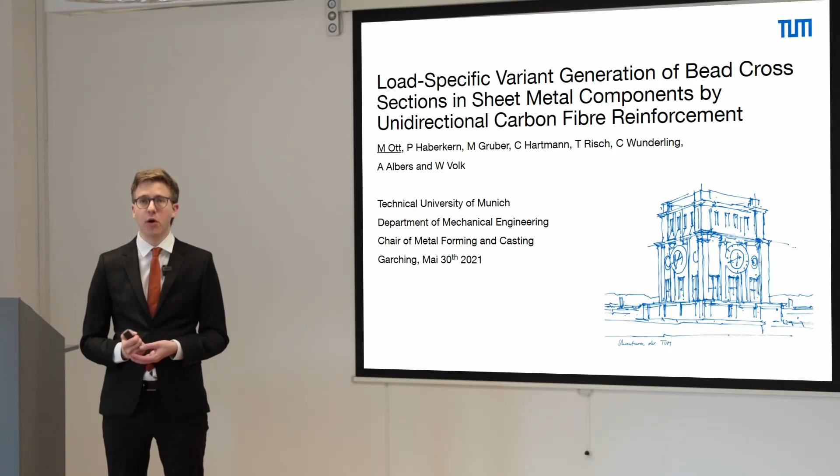Welcome to today's presentation where we would like to show our approach for the design of load-specific component variants in sheet metal forming using fiber-reinforced hybrid beads.

We'd like to start with a summary of the state of the art. Beads are channel-shaped load support structures which can be integrated in sheet metal components, as these three examples from the automotive industry show. To utilize the full stiffening potential of the beads, they must be aligned within the component.

In order to solve the resulting topology optimization problem, several numerical algorithms have already been developed. For example, the algorithm shown here by Macic aligns the beads according to the principal bending stresses within the part.

To summarize, several targets can be met by integrating beads into sheet metal components. First and foremost, it's an increase in bending stiffness, or when lightweight design goals have to be met, an increase in the mass-specific bending stiffness.

Second, a shift of natural frequencies can be used to deal with eigenfrequency and resonance problems. Third, the control of the deformation behavior in crash elements, which is important in the field of automotive industry.

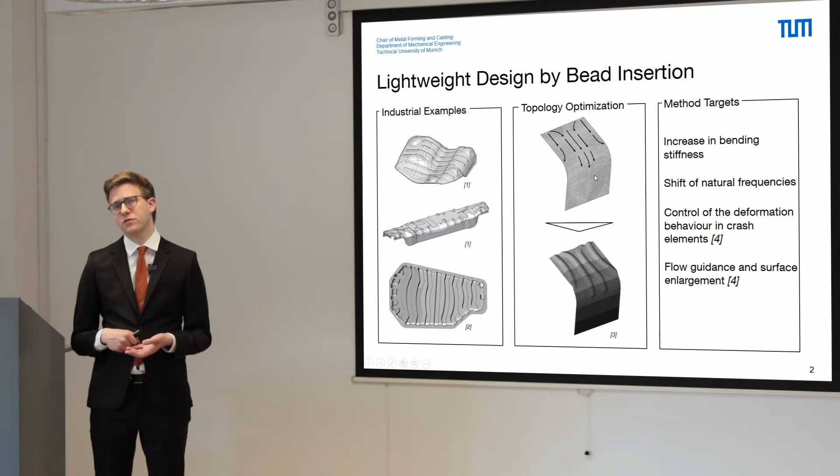And number four, flow guidance and surface enlargement of the beads show that they can be used for heat transfer problems.

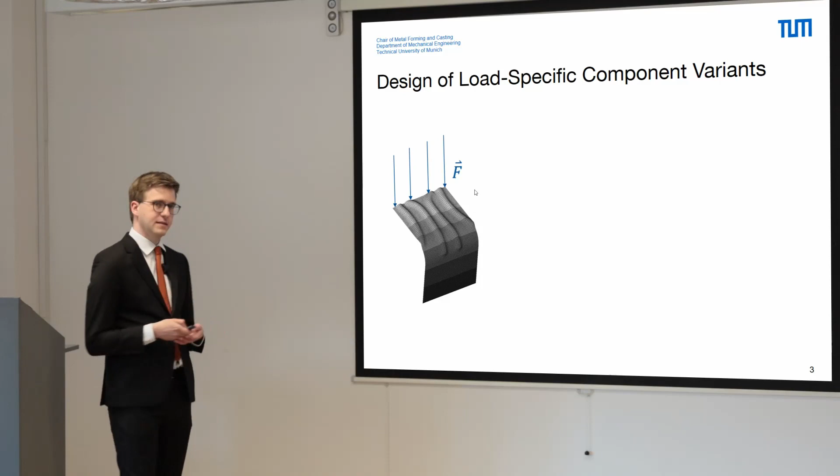Based on these results, we propose an approach which can be used to derive load-specific component variants. Various designers face the problem that multiple component variants are subjected to various load cases. In order to meet lightweight design goals, it is useful to create several component variants.

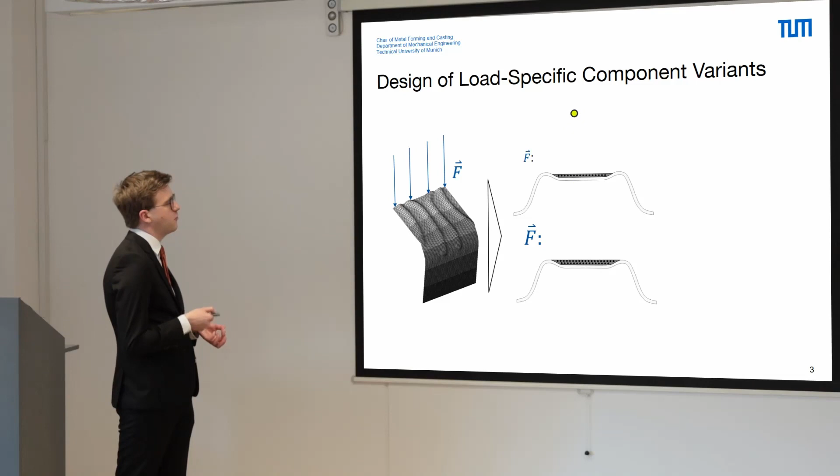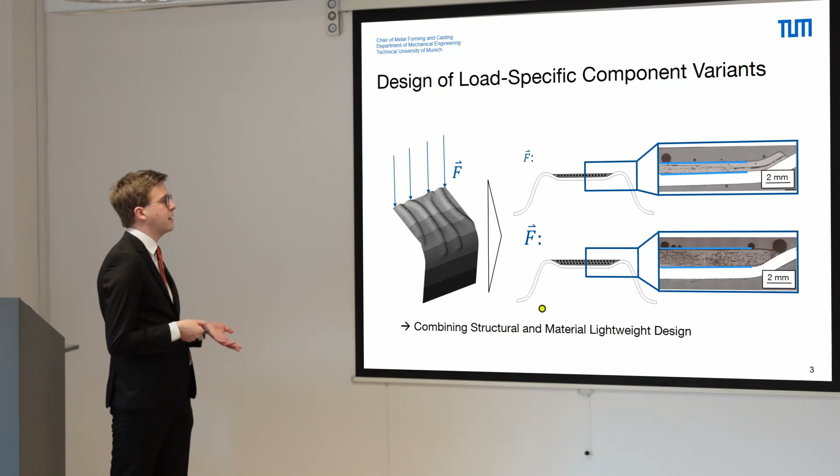And since changes to the forming tools are quite costly in metal forming, we suggest instead of bringing in multiple reinforcement structures which consist of unidirectional carbon fiber reinforced plastics. So the goal of our approach is to combine the structural lightweight design of the beads with a multi-material lightweight design.

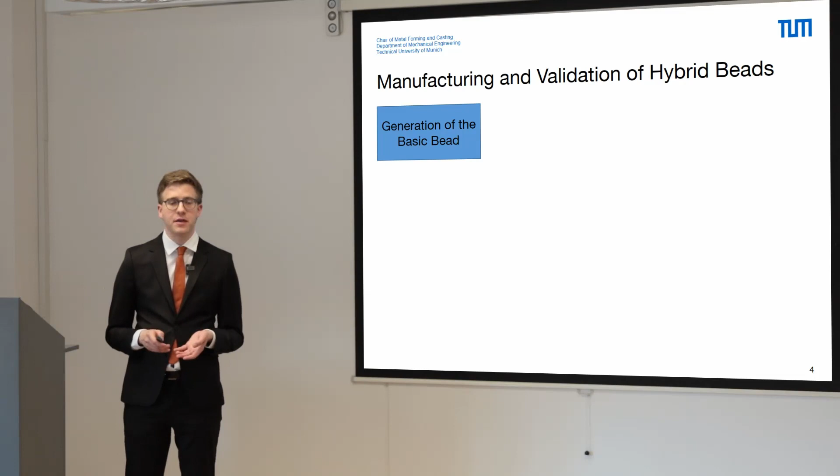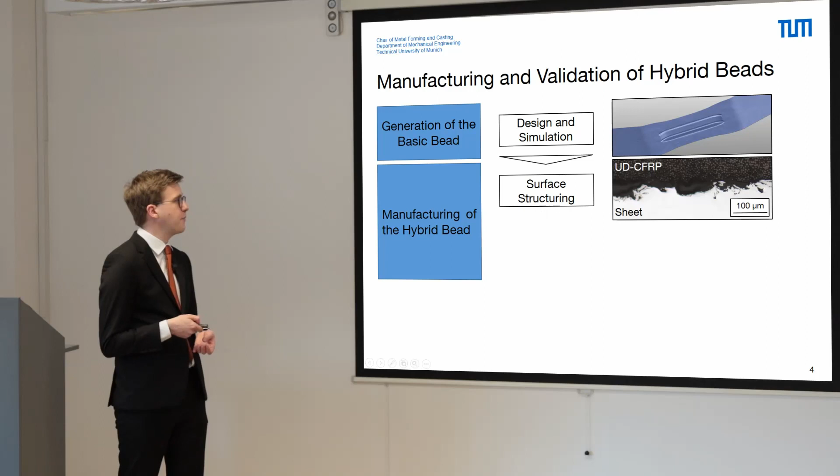Our approach therefore consists of several steps. In the first step, we generate the basic sheet metal bead geometry using design and simulation tools. In the second step, we manufacture the hybrid bead, which can be subdivided into a surface structuring step and the lamination step. The last step of our approach is to measure the supportable loads of our hybrid beads.

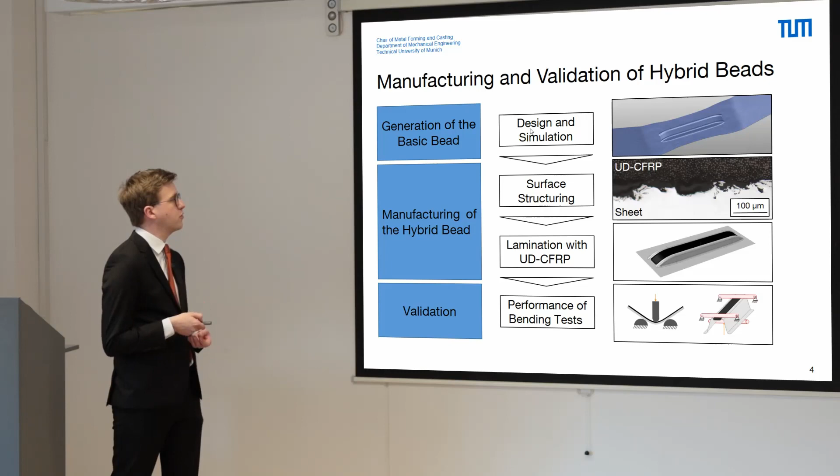For this validation task we performed several 3-point bending tests. To start with the first step of our approach, I'd like to show the resulting numerical analysis and the finite elements model which was created in Autoform.

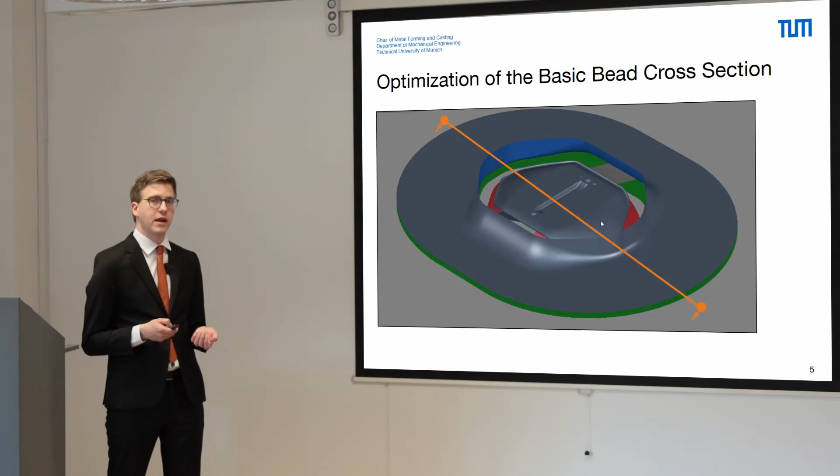In the central area one can see the bead, and I would like to highlight this orange colored cross section, since in the next slide we will see an animation of the tool movement which is needed to generate the bead component.

Here one can see the movement of the punch and the resulting bead geometry, which is also shown in the picture below. Actually, the design of the bead cross-section is more of an iterative process, since several optimization goals have to be met.

First, it's an increase in the manufacturable bead height without the occurrence of tearing, since a larger bead height is associated with a larger stiffening effect of the bead.

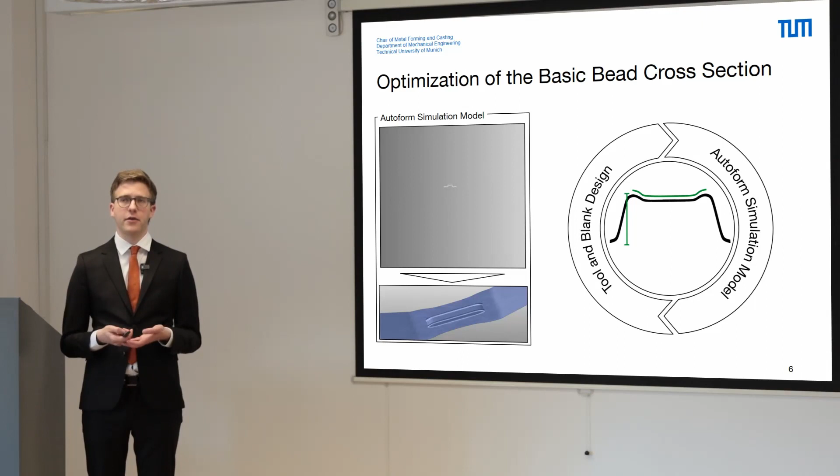The second optimization goal was to increase the upper surface area of the hybrid bead, since this is the area where the fiber reinforcement will be placed, and a larger bonding surface, a larger adhesion surface will generate both a higher bond strength and a higher reinforcement effect due to the larger amount of possible UD-CFRP.

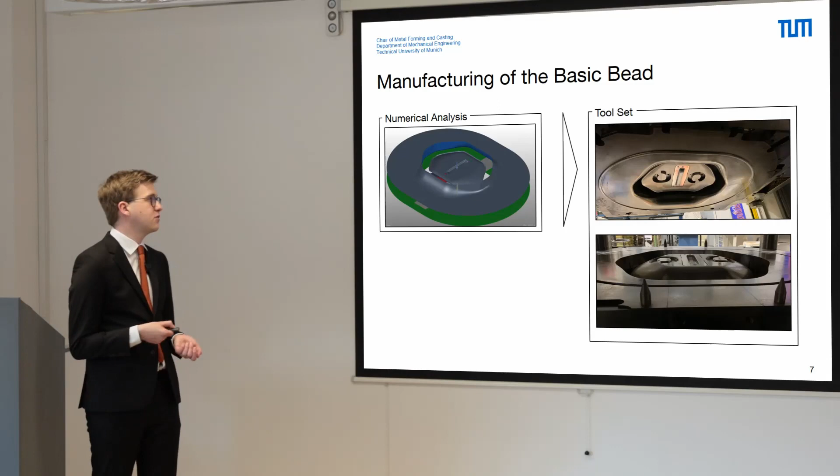So, based on the results of the numerical analysis, the toolset was manufactured and we were able to generate the basic bead geometry without the appearance of tearing for the DX56 steel.

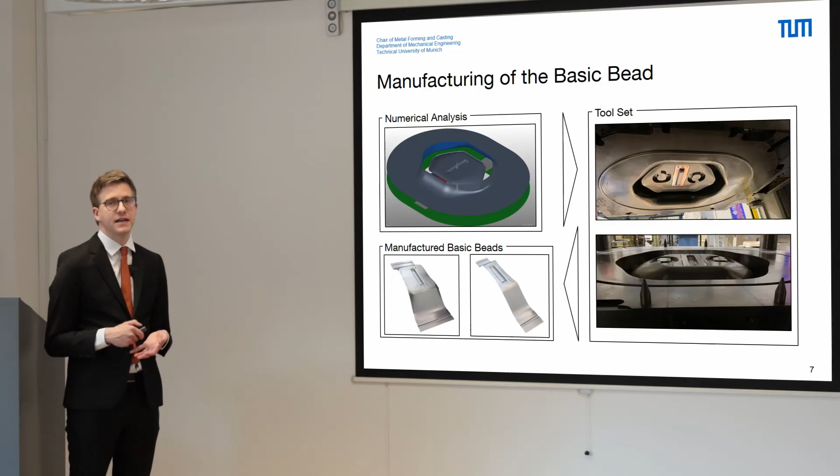After the basic bead geometry has been generated, we can now make preparations for the lamination process. Since mechanical adhesion theory predicts a better bond strength with the UD fibers after the lamination, our goal was to use several pre-treatment strategies which increase the surface roughness in the upper area.

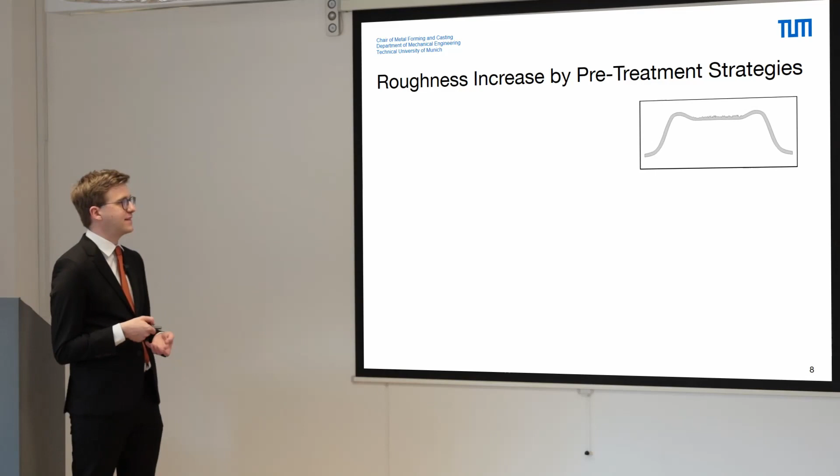As optimization goal, we choose the mean arithmetic height of the roughness in the upper bead area, and as reference we took the untreated sheet geometry, which shows only a very small amount of surface roughness.

In the first step, we tried several chemical etching processes using both nitric acid and hydrochloric acid, but none of the etching times of 90 seconds and 300 seconds resulted in a significant increase of the surface roughness.

We examined two other kinds of surface structuring pre-treatments. The first is laser processing, using both a triple bidirectional pattern and a circular beam oscillation pattern. The largest amount of surface structuring and roughness increase was achieved with the triple bidirectional laser processing strategy.

The last pre-treatment mechanism we examined was sandblasting, using both injector blasting and pressure blasting. Even so, the effect is not as strong as the laser processing. We will see in subsequent slides that we were able to generate sufficient bond strength, so we identified two different processes for industrial use of the pre-treatment strategies.

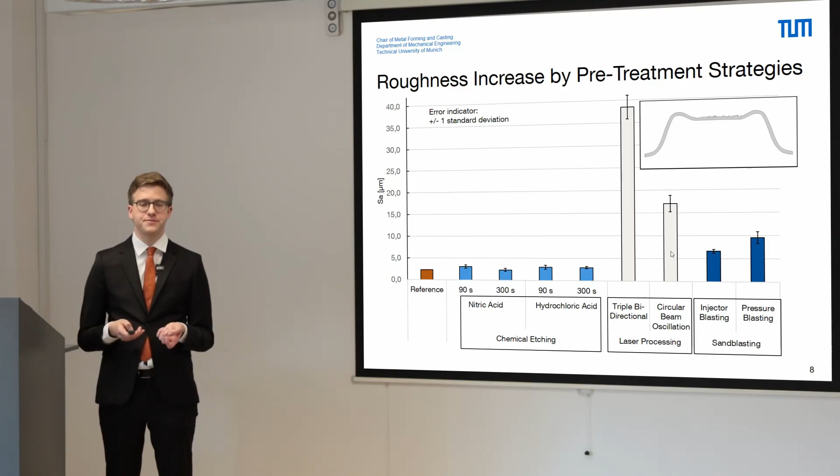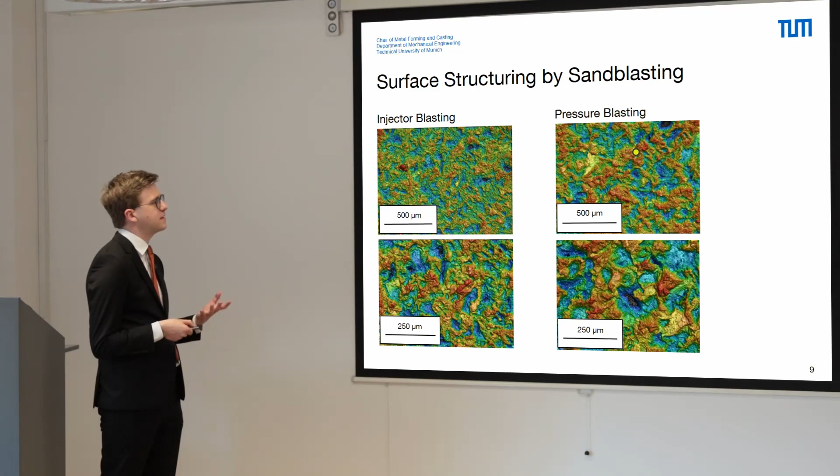When we analyze the resulting surface structure, we see differences between laser structuring and sandblasting structuring. Starting with sandblasting, on a microscopic level we see for both injector blasting and pressure blasting, at two magnifications, a more irregular, sharp-edged surface structure. The difference is that pressure blasting uses a higher amount of pressure, resulting in a more structured surface and larger surface roughness increase.

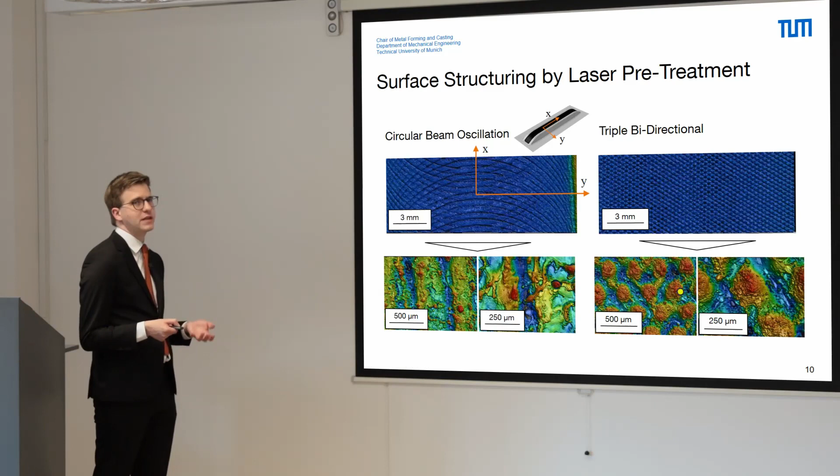On a microscopic level, we see more of a rounded structure, and here, for example, a molten and resolidified droplet can be seen. Similarly, here is the trajectory of the laser generating these triangular-like structures for the triple bidirectional process, also showing this more rounded structure compared to the sandblasting process.

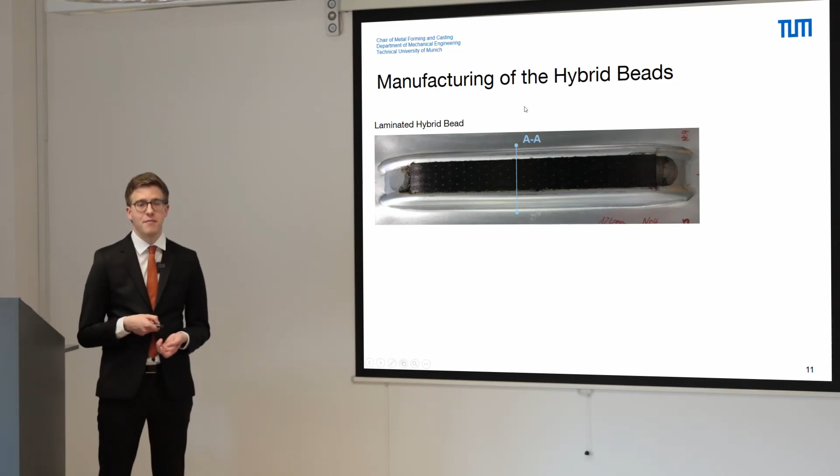Now we can manufacture the hybrid bead, and here is the lamination process. I'd like to highlight this cross-section marked in light blue - we took microscopic images of the manufactured samples. On the left is a manual laminated sample, in which fibers are placed on the top surface area of the sheet and resin is brought in by a hand lamination process. Second is the AFP-based sample - automated fiber placement - where pre-impregnated fibers are laid upon the bead cross section.

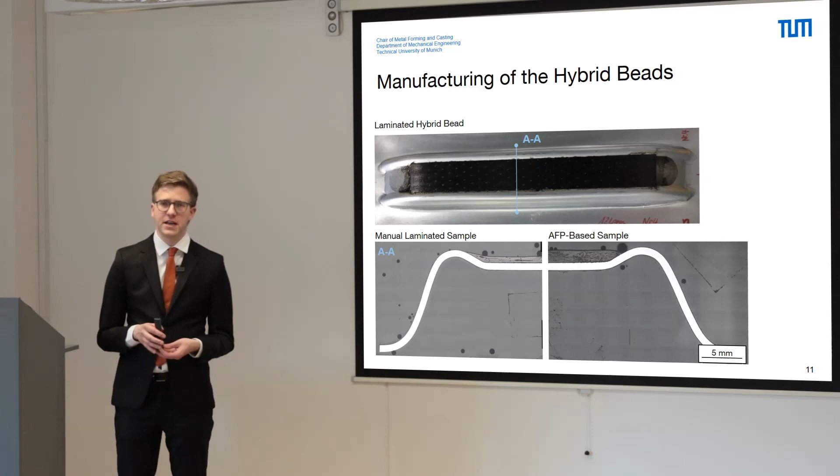The second aspect I want to highlight in this slide is that there's a different height in the reinforcement structure, and this is a necessary condition for manufacturing load-dependent bead structures.

When we analyze the microstructure of the resulting composite, we can see for the manual laminated sample on the left both the carbon fibers and the connector thread, which is used to hold the UD fibers in place before the lamination process. Next to these connector thread fibers, we can see some associated porosity.

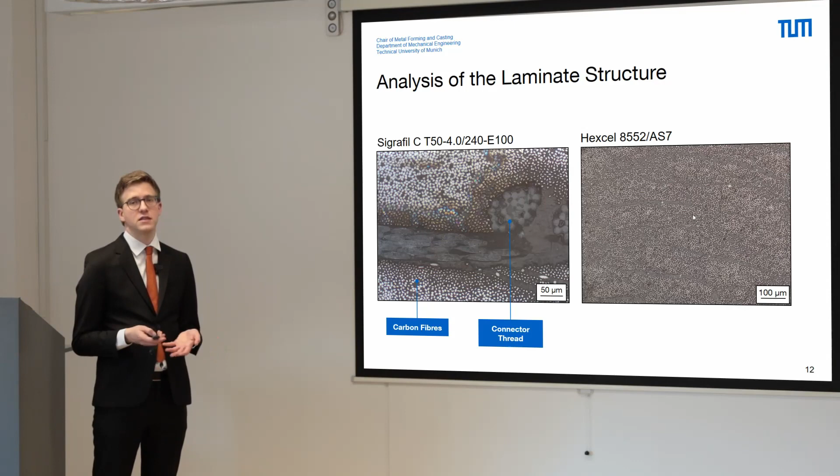Compared to the automated fiber placement strategy shown on the right, where a much more homogeneous structure can be derived. Therefore this automated fiber placement strategy, or pre-preg based strategy, is the better choice for further industrial applications of our hybrid beads.

But not only the cross-section of the composite is important, also the interface, due to the possible problem of delamination. Here we can see that, as the mechanical adhesion theory predicted, we were able to manufacture microscopic undercuts in which the matrix resin can flow, forming sufficient bond strength for our further experimental investigations.

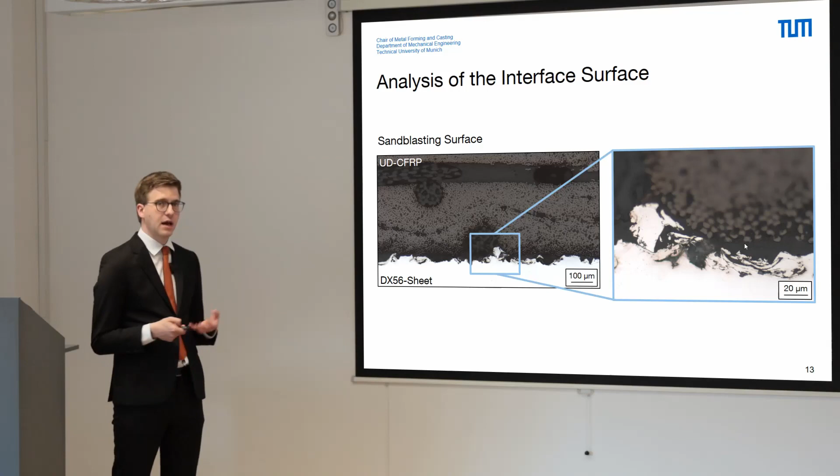For the sandblasting structure, as we already saw in previous microscopic images, it's more of a hard-edged and irregular surface structure due to the impact of the blasting particles. For the laser surface structure, we again see the more rounded structure - the results of melting and resolidifying of the laser rays on the sheet surface, and here a laser-induced groove. To conclude, the laser structuring surface strategy was also able to generate sufficient bond strength.

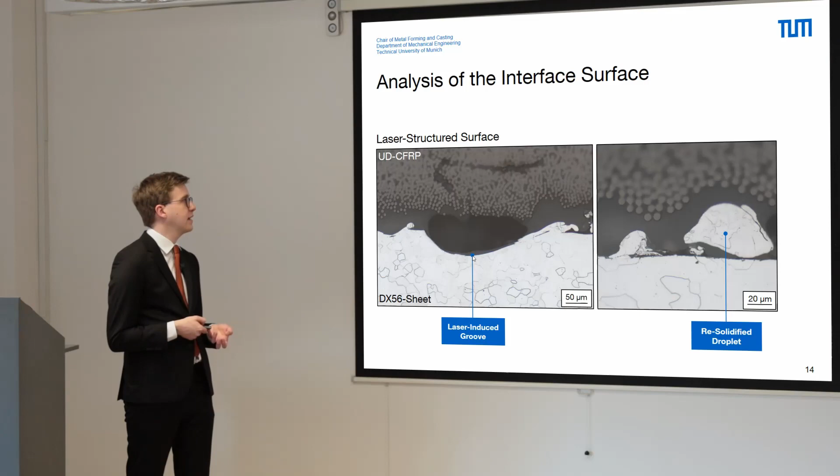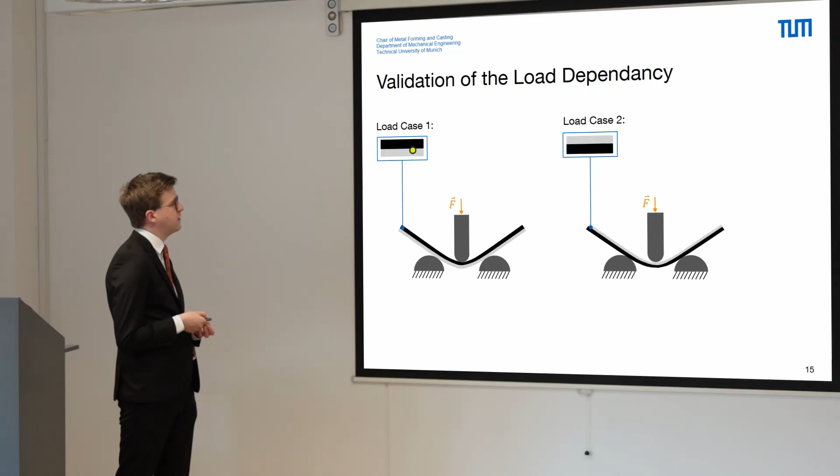Now we can see the validation process. We started with a preliminary study in which we laminated the sheet metal component with the UD fibers and performed two different experimental configurations of the three-point bending test.

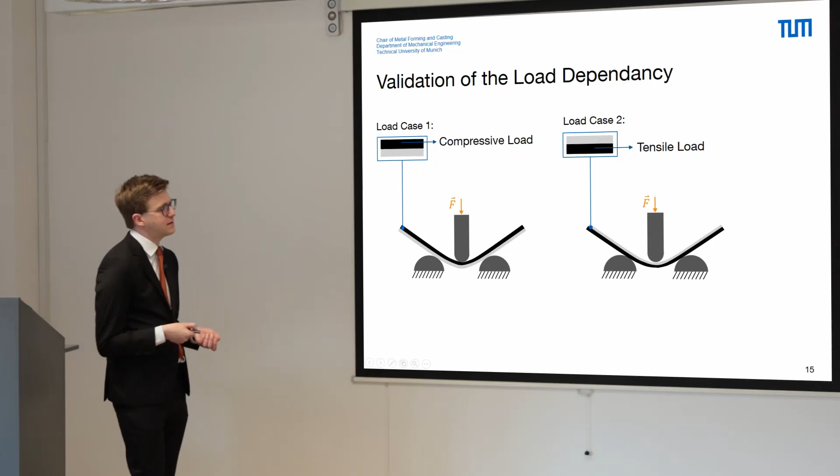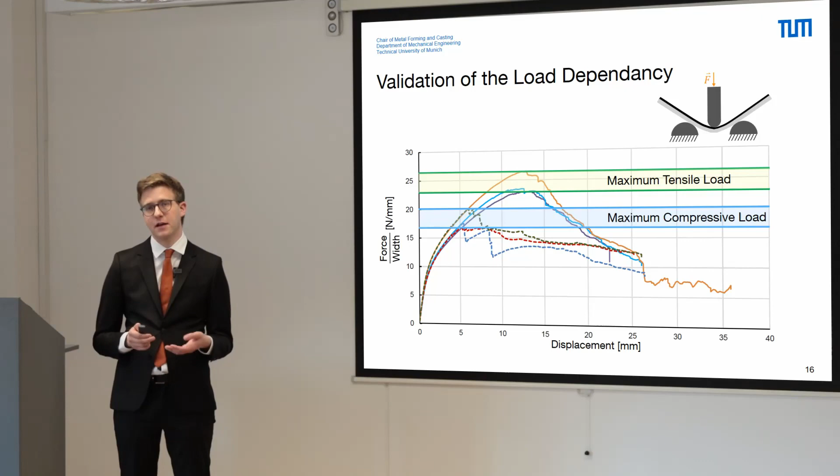In the first configuration, the UD fibers are subjected to compressing load due to the upper position of the experiment, and in the second configuration we performed a tensile load since they are now in the lower position. The results show that the maximum tensile load is significantly higher than the maximum compressive load from these three samples.

This can be explained by phenomena such as micro-buckling of the fibers under compressive load. Therefore, in the next experimental investigation, we performed three-point bending tests on the hybrid bead geometry itself, and we only analyzed the configuration where the UD fibers are subjected to tensile load.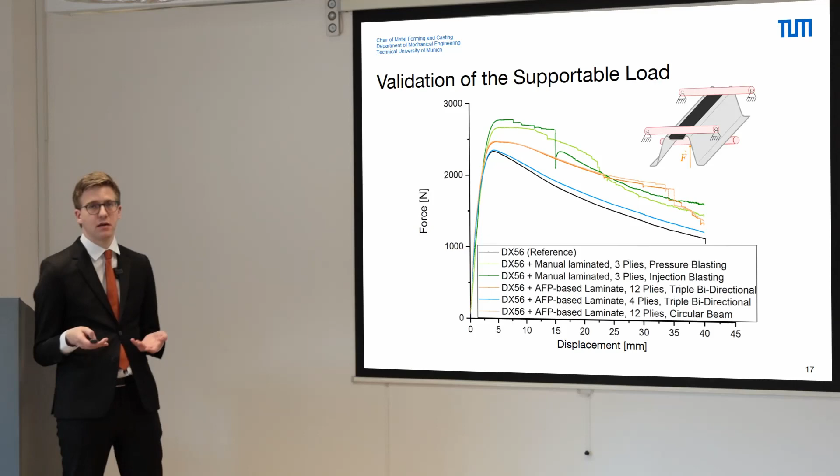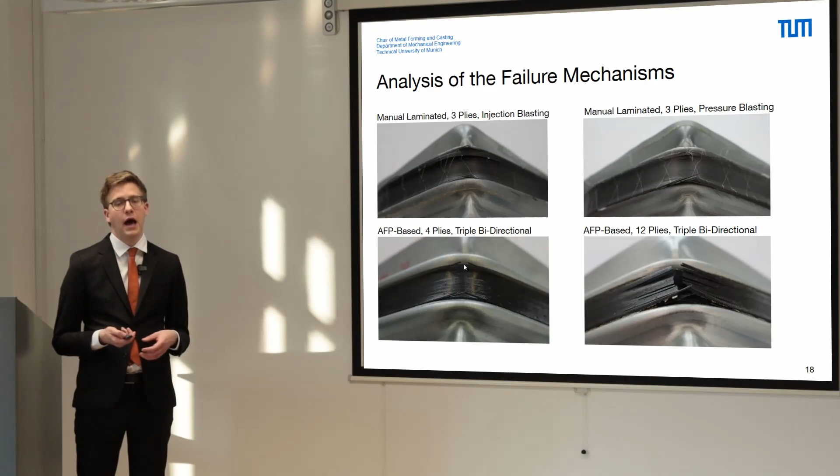To give a short summary of our research work, our main goal was to show the manufacturability of the hybrid bead. First, the tear-free production of the adapted bead geometry. Second, the surface structuring, which shows a short cycle time of less than 30 seconds for both the laser mechanism and the sandblasting mechanism.

And third, there's an application-oriented lamination process with the AFP-based strategy which we used. We would advise for further implementations of the hybrid beads in industrial applications to use this lamination method.

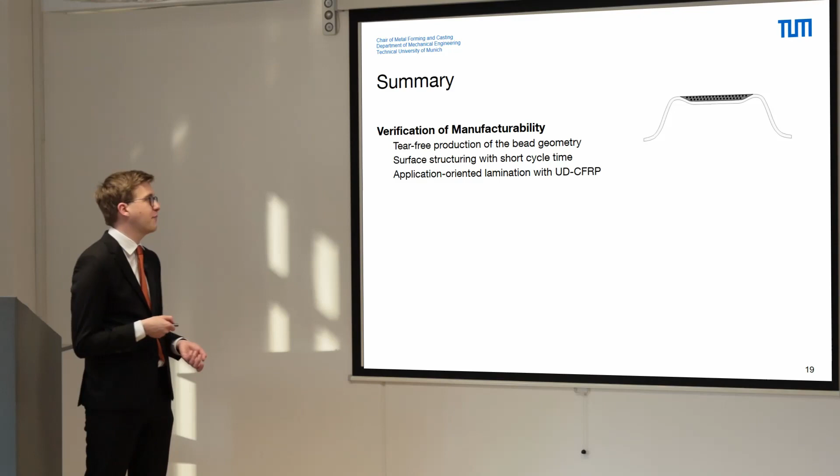Then the second main goal was to show the load-bearing behavior of our hybrid beads, showing an increase in the maximum supportable force, and that this increase is dependent on the number of plies laminated on the top surface of the beads, which is a necessary condition for the design of load-dependent component variants.

And last but not least, we show that there's no premature failure due to delamination using these structuring strategies, so no additional interlayer such as an adhesion promoter is needed for these hybrid beads.

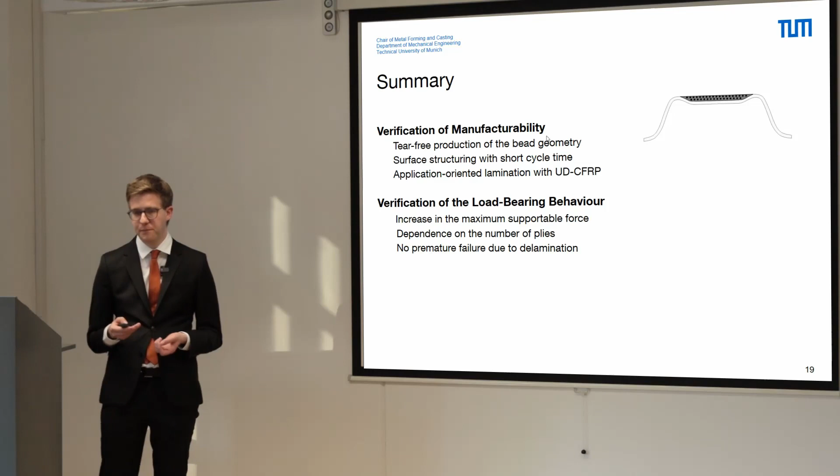To give a short outlook on further research activities, we would like to couple our hybrid beads with the optimization algorithm of Majic, which we had already shown in the introduction of this presentation, and we think this enables users to design their components and integrate the hybrid components and load-dependent variants in a fast and efficient way into their own components.

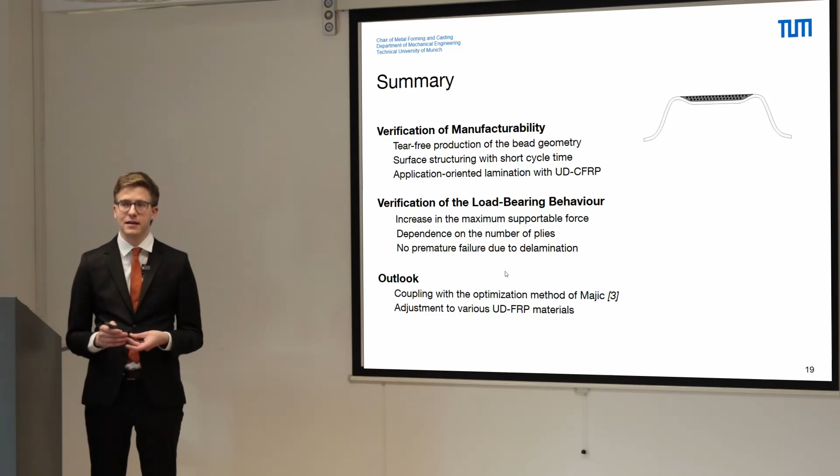Furthermore, we'd like to examine an adjustment of our hybrid bead method to various UD-FRP materials, for example using glass fibers instead of carbon fibers, where a decrease in costs can be realized, or basalt fibers, which propose the ability to use hybrid beads at higher temperatures due to high temperature characteristics of the mechanical basalt fibers.

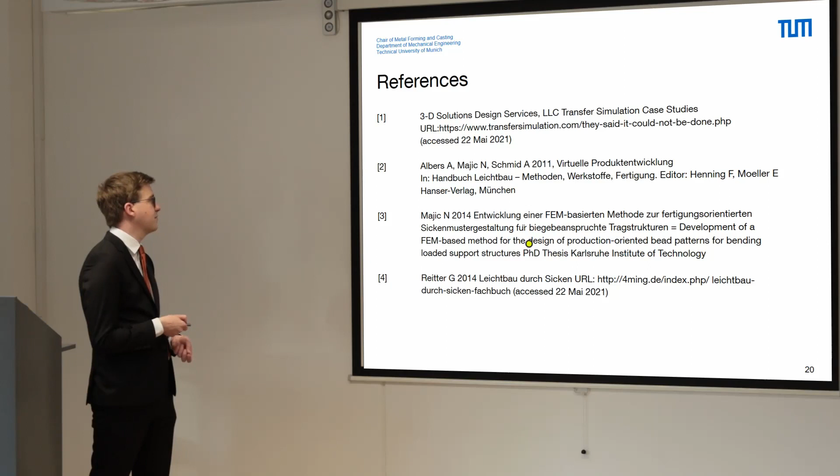Here we give a short summary of the references used. For example, the optimization algorithm by Majic is described in source number 3.